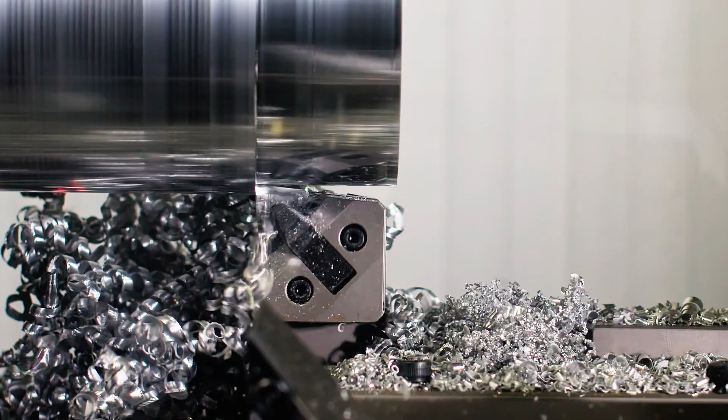The interpolation turning function enables you to perform off-center turning operations on standard machining centers and B-axis lathes in a single setup. In some cases, turning operations are indispensable for achieving quality objectives.

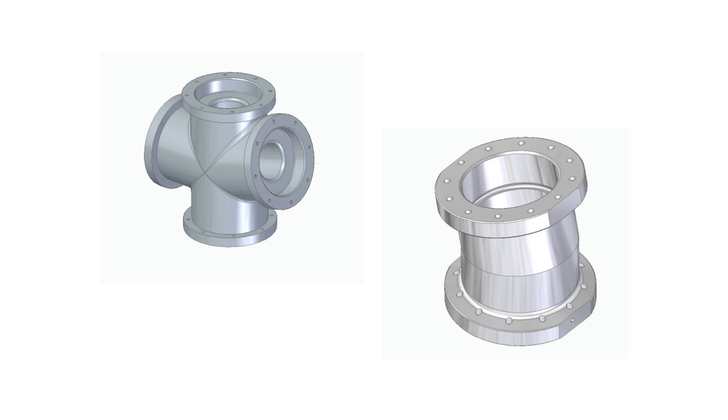For example, to turn the internal profiles of these parts, you would need to set up a very complicated machine setup with a high risk of dynamic imbalance, or else proceed with the complex installation of auxiliary motorized axes. The coupling diameters of the fittings must be machined by turning operations, not milling, to prevent fluid leakage.

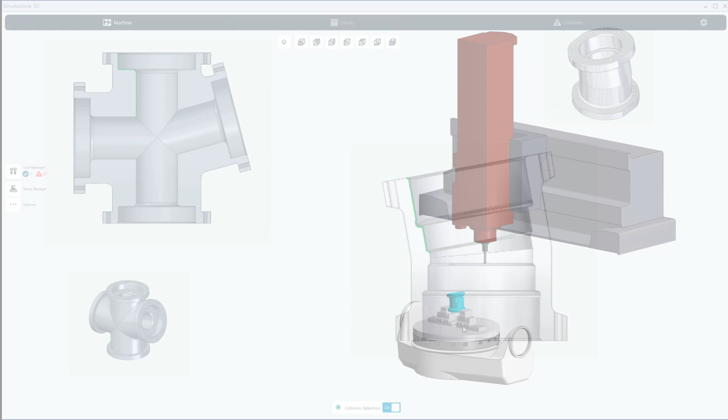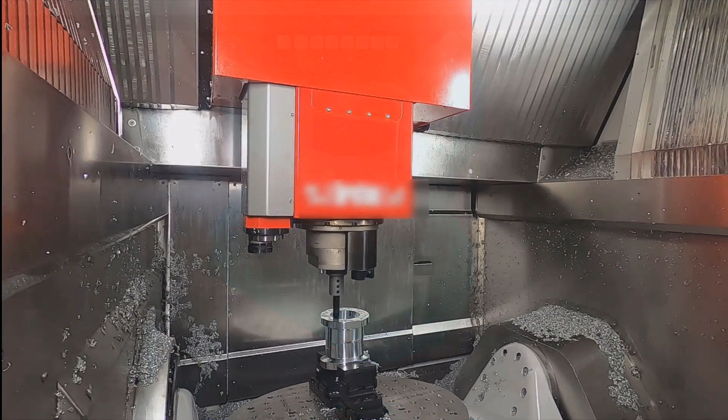First of all, you need to perform an orientation so that the tool axis is aligned with the turning profile. With interpolation turning mode enabled, the geometric axes of the workplane begin to interpolate along a circular path. The tool orientation is perfectly synchronized with the angular phase of the circular interpolation. This makes it possible to keep the cutting edge of the tool in constant contact with the workpiece.

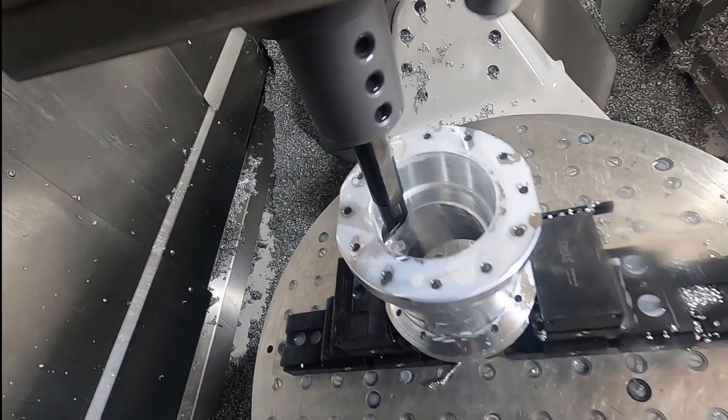By moving the offset of the working plane, that is, the axis of the profile to be machined, the diameter interpolated between the X and Y axes is adjusted to obtain the dimensions required for machining. In this way, the machine can carry out the machining, making full use of the potential of turning and profile turning cycles.

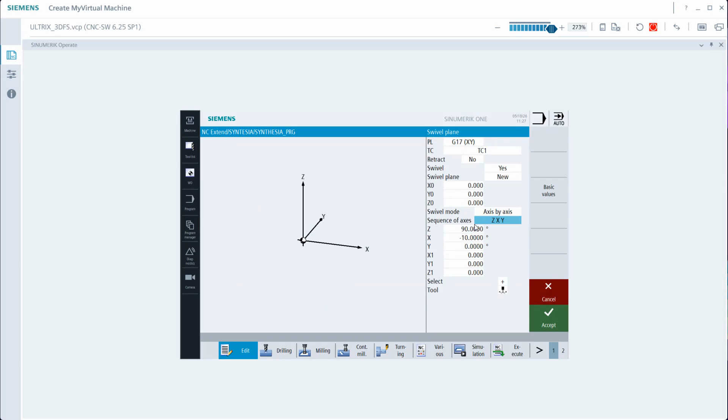Let's now analyze the program structure used to machine the part shown in the video. After the usual heading, you need to program a new orientation plane to align the tool axis with the axis of the turning profile. You'll need to choose the best orientation solution based on the machine kinematics and the type of tooling setup.

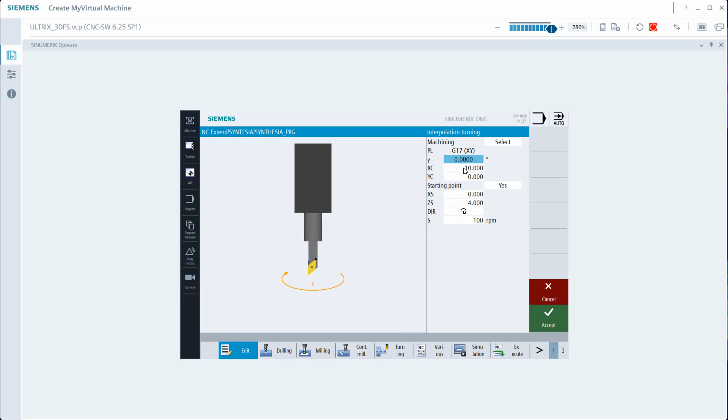Next, the interpolation turning function is enabled by programming cycle 806. The first toggle lets us choose whether to enable or disable this mode. In the gamma parameter, you set the tool's initial orientation to angularly phase the cutting edge with the part profile. In the XC and YC fields, you must specify the X and Y positions of the axis of revolution, that is, the axis of the profile.

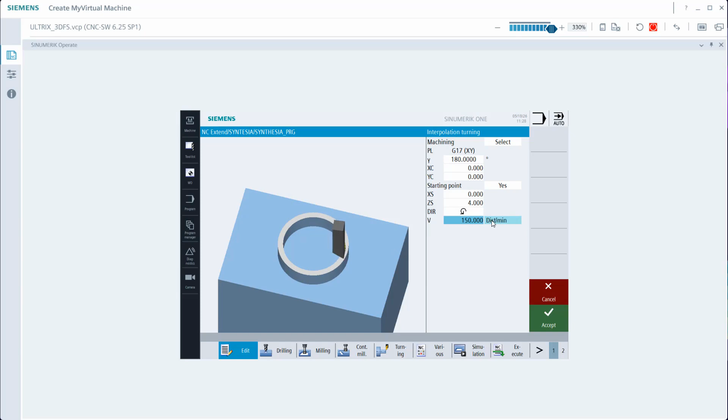It's possible to specify an approach point in the XS parameter, diametral approach, and the ZS parameter, axial approach. The direction of rotation of the cutting motion must be set within the cycle in the DIR parameter. The last parameter contains the tool's revolutions per minute or its constant cutting speed. In the sample part, a profile turning cycle was used, and we'll see its definition later on.

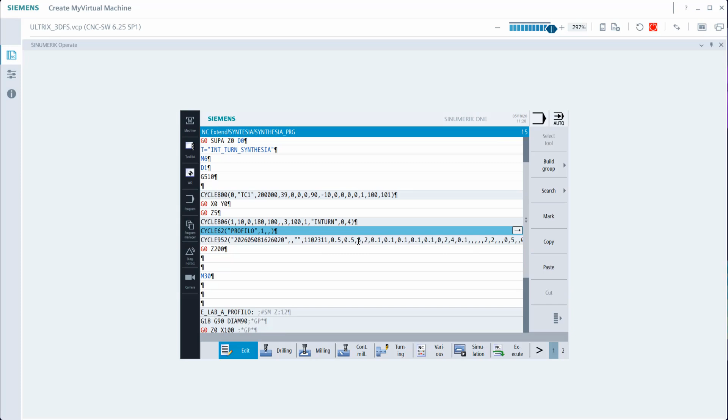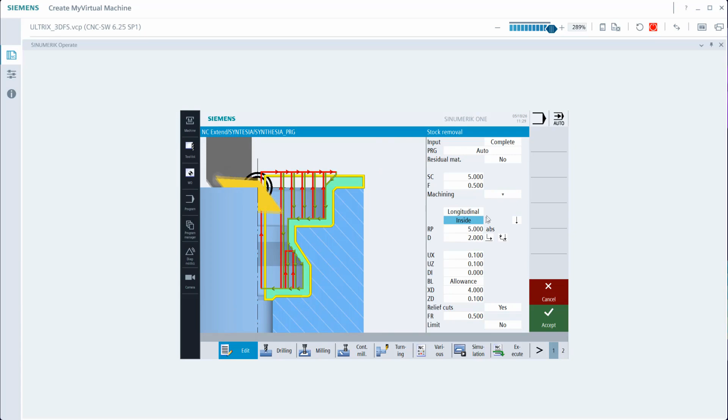For the machining, cycle 952 was used. The definition of this cycle's parameters is exactly the same as for conventional turning. The safety clearances, the feed rates, and whether the operation is roughing, finishing, or both in sequence must be set. If the machining will be longitudinal, as in our case, radial, or parallel to a profile. The same applies to choosing an internal or external profile, and the same goes for all the parameters of cycle 952, just like in traditional turning.

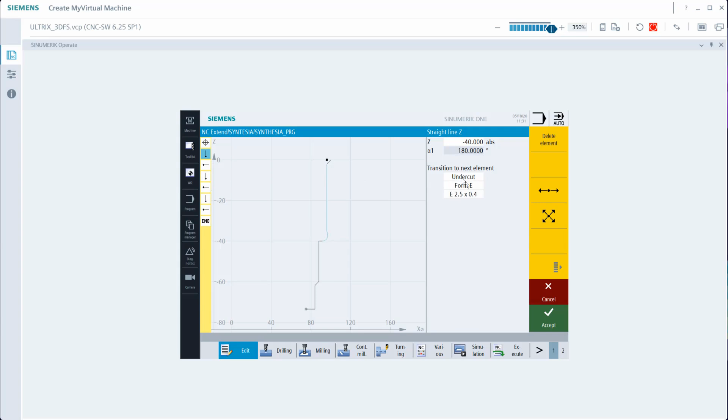Let's now take a quick look at defining the finished profile to be machined. The generation of the profile, or the profiles needed for machining, is done using the dedicated SINUMERIK editor. It's possible to make full use of this editor's potential by defining chamfers, fillets, and reliefs already integrated in it, for example, Form E, Form F, or DIN. It could be a very useful and flexible strategy for machining relief grooves for bearing seats, etc.

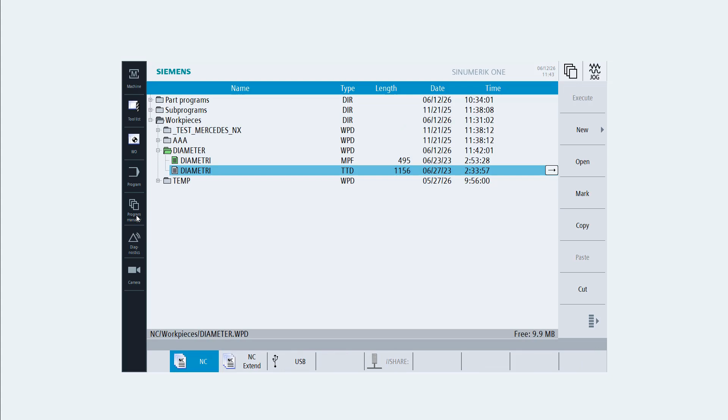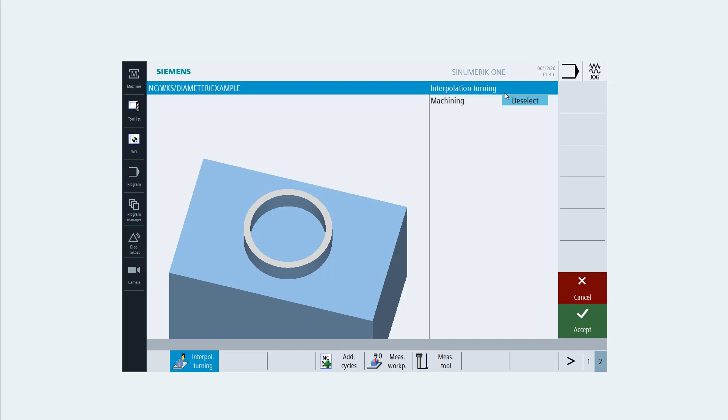Let's create a new program and see where to find the menu for setting interpolation turning and the cycles associated with it. Once the editor is open, press the right arrow to access the second horizontal soft key menu, where you'll find the interpolation turning key. Pressing it displays the vertical soft keys. The second from the bottom is cycle 806 to enable or disable interpolation turning mode, as we've just seen.

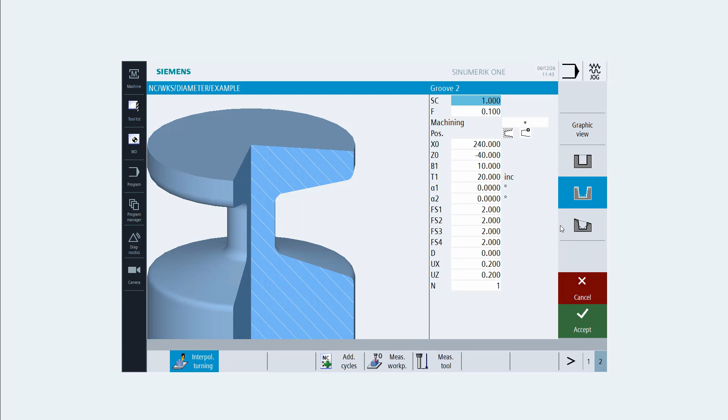Starting from the top, we have the classic roughing cycle with its options, as in traditional turning. The same goes for the cycles for creating grooves. You can also use the cycles for grooving operations with angled walls and on conical surfaces. Also, all the cycles for machining relief grooves can be used with the interpolation turning function. This makes it possible to take advantage of all the automatic features provided by the cycle and all the standardized tables integrated into the programming screen.

To machine freeform profiles, after defining them in the editor, you then call up the profile name. And you need to choose the machining cycle, selecting between roughing, removing remaining material on the profile, cutting grooves, or removing remaining material for grooves. At the end of the machining process, you need to deactivate interpolation turning mode by selecting Deselect in cycle 806.

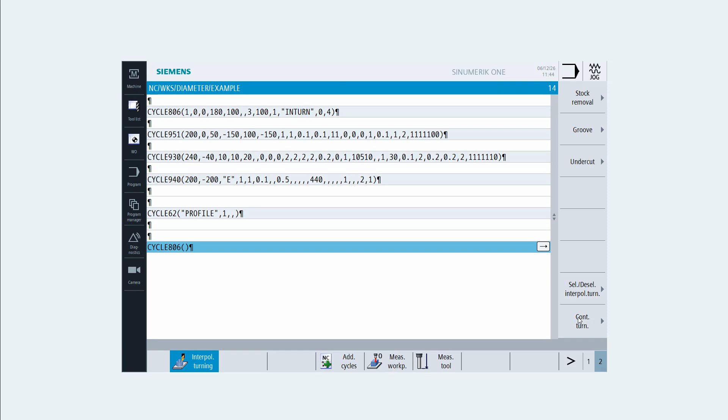In summary, the interpolation turning feature enables turning operations on milling machines or lathes with a B-axis, even for off-center or misaligned profiles. It avoids installing complex add-ons such as powered tools and additional axes. It potentially reduces the number of setups needed by limiting the amount of equipment required. It also allows flexible machining of reliefs, for example for bearing seats, without the need to prepare dedicated tooling. And finally, it allows you to take advantage of the benefits offered by the turning cycles integrated in SINUMERIK.